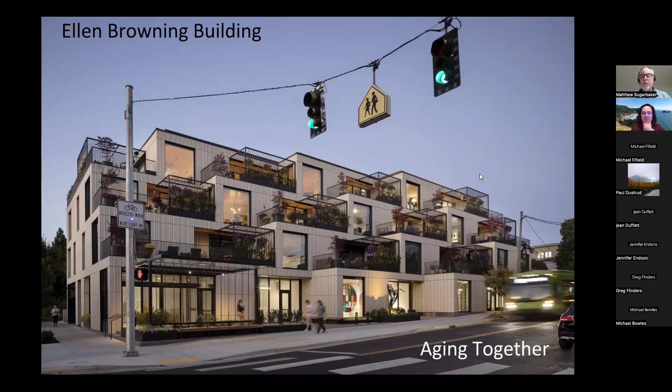When we first were approached, hold on, it's not advancing. Oh, maybe we should have tested that too. There it goes. We don't need to do the continuing education stuff since Kathy already did that.

When we were first approached by the client, they were a group of friends and family that lived in town in Portland and traveled together and hung out together and had been that close knit group for a long time. They really started to talk about how do we keep doing this as we grow older? How do we grow old together? This was sort of the word cloud that we discussed quite a bit at our first meeting. And that concept of how do we age together became very important.

The main clients were two families, the parents and the daughter, the McCabe's, and they really drove most of this design. They were like, how do we keep together and not, as we age, get isolated as people tend to in single family homes out in the suburbs, or even in multifamily buildings, where as you age, it tends to isolate you. They were concerned about that.

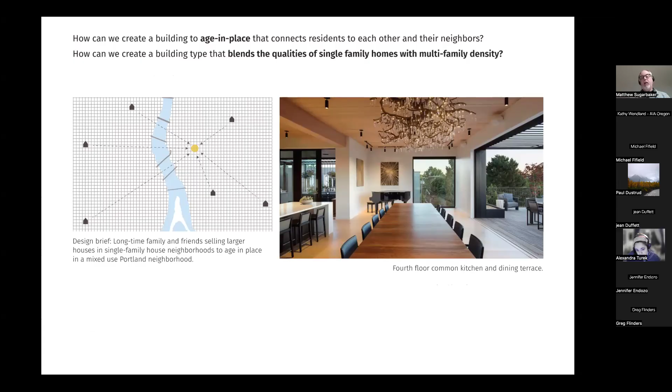That question of how do we create a building, what does a building look like that supports that aging in place concept, but is also in a downtown, more urban, multifamily setting. So how does it feel like a single family home, but in a multifamily sort of density?

The neighborhood they picked, and they came with this site, we didn't help them with site selection, was in the neighborhood of Portland, southeast Division Street, which is a very walkable, vibrant, multifamily, mixed use street. It's about 10 blocks that have really densified over the years. This was a site that just had a couple of single family homes on it, and over the years they've been replaced by these sort of 4-story buildings. But it means there's a lot of life, a lot of activity on the street, and they really liked the walkability of this site.

But what most buildings are on this site, sort of 4-story, pretty dense, stacked in, not a lot of amenity. Most of them are really just retail on the first floor, multifamily at the top, pretty efficient. Hacker has 3 buildings over on 33rd, this one's on 28th, so we've done a lot of work on this street, and it's a very efficient type of mixed use building.

They wanted something a little different. Also, the fact that they were just doing 10 units, the program was just 10 multifamily units and some mixed use, we didn't need to use all the FAR on the site, all the floor area ratio. So we had a lot of room to sculpt the 3-dimensional form. So how do we break down that scale?

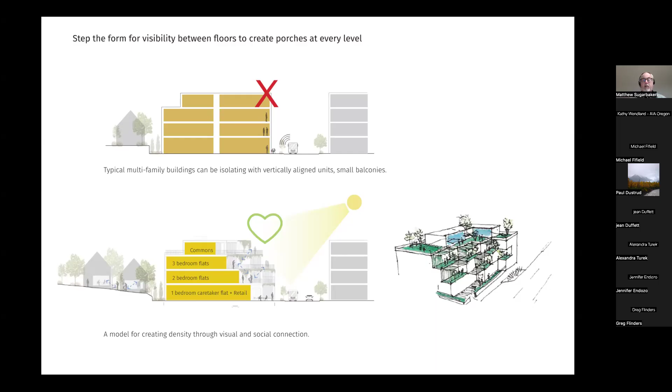The drawing on the bottom right was one of the first sketches Corey did of how do you break that down in a different sort of way. One of the things they came with is when they vacation, they go to Greek hill cities, and how connected those feel, how even though they're all these individual little buildings, how much they're visually and acoustically connected and very vibrant. That was a big inspiration for this building.

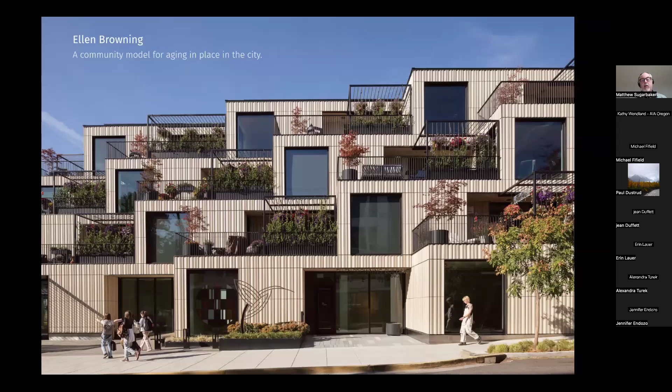So we ended up looking at how do we sculpt this building back and sort of mimic the hill. Behind this neighborhood, or behind this building, is a big rolling hill, and how do we mimic that hill geometry and connect these units, unit to unit, being able to see each other and interact, although having your own isolated single family home on one level that's easily accessible, but then being able to see all these other levels adjacent to you.

We also have a lot of indoor space, but every space having their own private outdoor space was very important. This was a way for us to break down that scale and give each unit their own sort of private and semi-private outdoor space, as well as obviously their indoor space.

That connectivity from terrace to terrace became really the first concept of how we connect these units in a different way than most multifamily buildings, so that your neighbor is a part of your life. As you're out on the deck and other people are on the deck, you can have those conversations, see each other, interact in a more natural way than having to break through the inertia of going up and knocking on somebody's door. They wanted something much more organic, but also spaces for coming together and connection, which we'll get into in later slides.

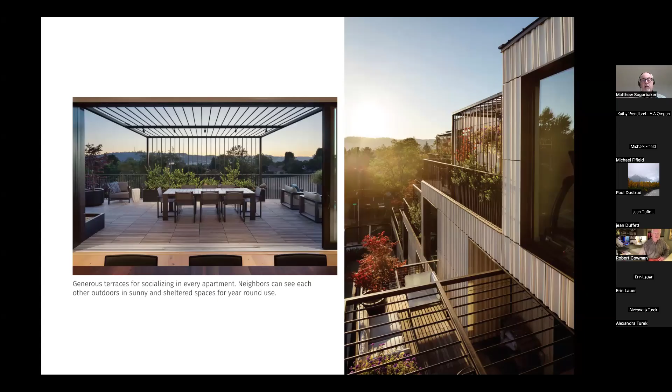The entry to the building, in the center here, is also part of that same community. That lobby was meant to be a public art gallery to showcase the family's artwork, and it has been over the last few years this roving, changing art gallery that was open to the public. Right now it's actually showing artwork that people in the building have created, but it was also showing artwork that they own. It's another way to bring the public in and interact, have this building interact with the neighborhood and the public, and have a way to not make this building feel too isolated, bringing in outsiders as well, but in a controlled way.

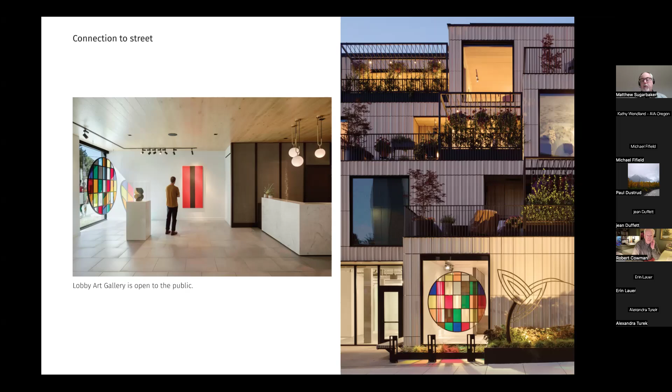So we're excited if somebody gets in there to see how that fleshes out, but so far we've still been looking for the right tenant.

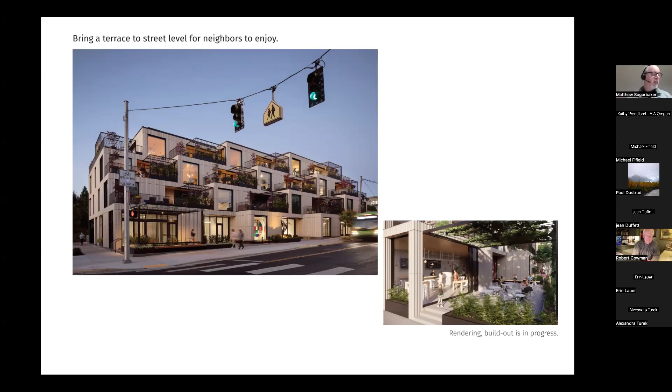In the lower right here, that's the other retail. There are two small retail spaces, one of which is now the building manager's office, and the other one they're still looking for a tenant for, but having some standard small retail spaces could help inform that public interaction.

So we were talking about the terraces mostly — that was a big driving factor in the shape and the form of the building. But the other thing this peeling back of the mass allowed the units to be is open on multiple sides. Some of them are on the corners, but some of them aren't. This peeling back also allowed the interior units to have access to light and air from at least two sides, and some of them have access to three sides, which is very unique for this sort of multifamily density building.

And then having these spaces have outdoor space that's covered, outdoor space that's not covered, outdoor space that's sort of separate. We have this trellis that goes over part of the outdoor space, and once the vines grow up a little bit more, they'll be very private. So you have this sort of private outdoor space, and then you also get out into the more open outdoor space.

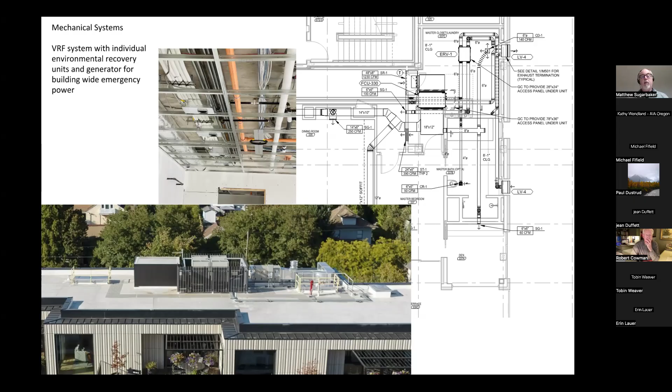The building also has a generator in the basement because they had significant emergency power desires in the units, way more than just emergency lighting and things like that. Every unit has dedicated outlets for if they have equipment or medical needs, and outlets in bedrooms and living rooms that were on emergency power. So the emergency power for a building that seems relatively small was actually a decent sized generator, because quite a bit of the building is on emergency power. But that was part of the aging in place concept, not knowing what type of medical needs or equipment would be in the units, and having some peace of mind that the building could handle whatever they throw at it as they live there for years and years.

For the outside, we were trying to make it out of something that could really help with the main concept, be durable and long lasting, require very little maintenance, but also support the concept. So we ended up with this fluted terracotta system, integral color, that changes how it looks as the sun moves and as it changes. This warm color, inviting to touch, interesting shape. You're really next to this cladding quite a bit since there's so many outdoor spaces. We wanted something warm and dynamic and ever changing, that sort of mimicked the natural biophilic patterns and shadows that plants and other things give, something that would feel just a little bit different every time you look out.

But we didn't want to have it too crazy custom, so this whole building is made of 4 shapes. Everything in the whole building is just these 4 shapes: 2 straight shapes and 2 corner shapes, and everything is just different lengths of those same shapes. But it meant that this building is on a very strict module. It's not like other siding materials where you can just trim up a panel a little bit. You can't do that with any of these. So every corner, every window, every joint had to be very meticulously followed, lining up on what the module of the system is.

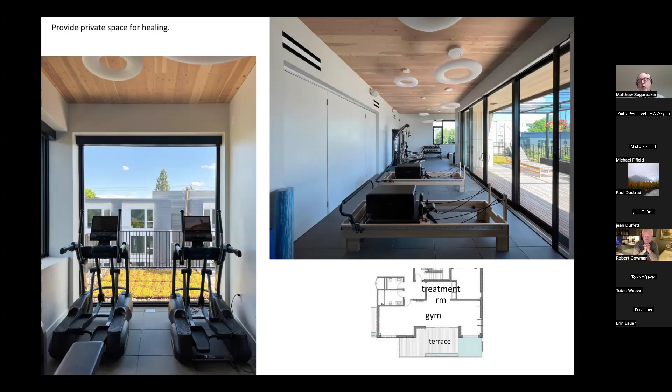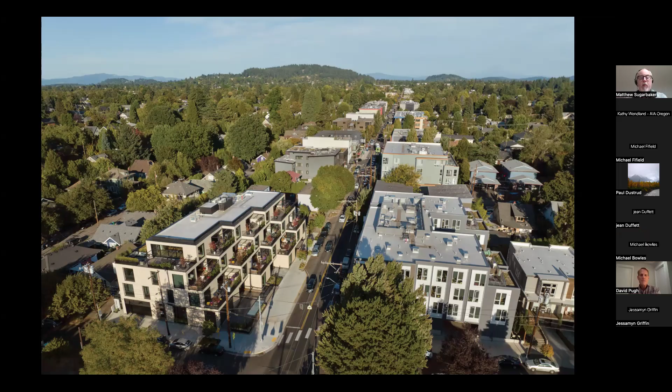What I was kind of curious about, looking at the floor plans, was I love how it steps back. I live right next to this building, and I didn't realize the inspiration was like Grecian hills. So that's fun for a flat site to kind of mimic that.

We did all the shear on that stair elevator core. Every bit of it is in that one core. Yeah, it's a really thick wall, it's doing a lot of the job. Then the other stair is just a framed-up braced stair, it's not doing anything special. But yeah, those two thick wall tubes you see in the middle are doing all the shear. And around it there's a bunch of shafts that are the main vertical connections running all the way through the building.

Because as this building steps back, we can't really have any shafts on the south of the building since it keeps moving on you. And even on the north of the building, it moves back when you get to the 4th floor. So this middle stair core was our main vertical heart of the building - shear, mechanical, vertical circulation, all the vertical penetrations were done through that. There are little penetrations all over the place, but that's the main trunk line of everything.

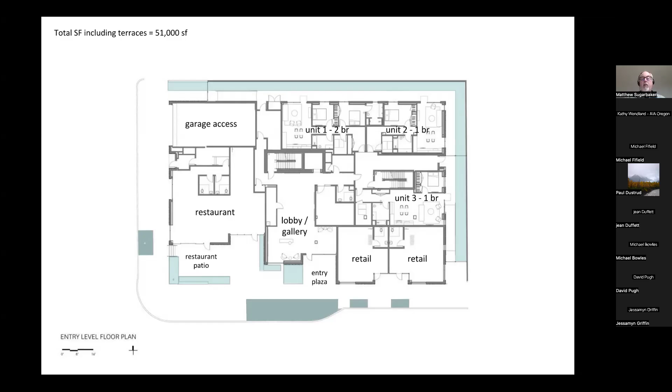Lori asks, what's the average square footage of each unit? That's a good question. The residential area is 31,000 square feet, and there's 10 units, but some are really small and some are really big. Like this 1-bedroom unit on the corner on this floor is different than the 2-bedroom unit 10, which is this whole side.

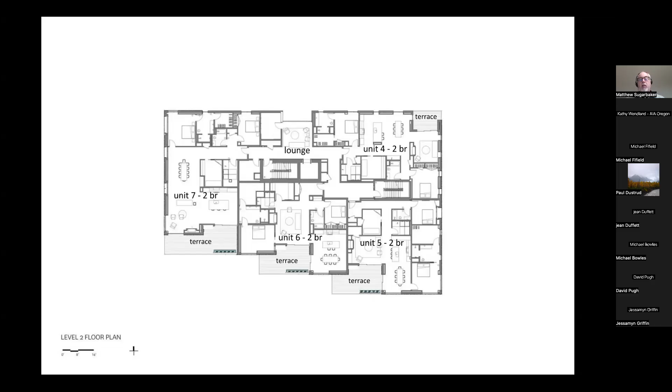That unit's pretty large. They're pretty big, but they're also pretty small. I'd say the big units average around 2,000 square feet. They're pretty big. These on the second floor are a little smaller, but really unit 9 and unit 10 are enormous, and they both have 2 terraces - really, really big units.

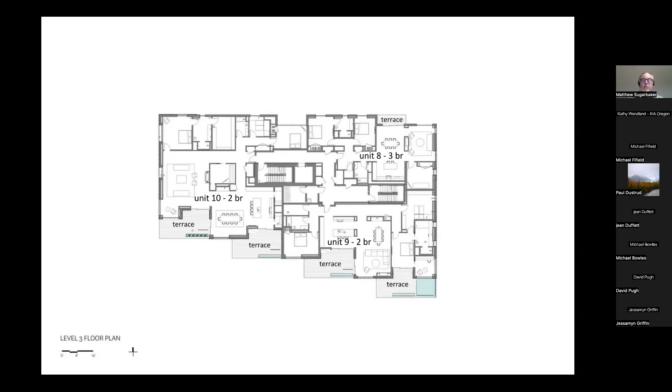Any more questions? We got to fill 2 more minutes, guys. So we're legal.

A bunch of people weren't on when Jean on chat asked me this question - I was going to share it, but she cut to the chase. Ellen Browning, the name of the building, is named after Ellen Browning Scripps, who was a big philanthropist in Southern California, La Jolla, in the late 1800s and early 1900s, and set up tons of foundations and organizations that have Scripps as part of the name. They were big newspaper owners and owned a bunch of stuff back in the day. She is related to the McCabe family, and they really respect her and the work she did in the community, so they wanted to name the building after her. That's where the name Ellen Browning came from.

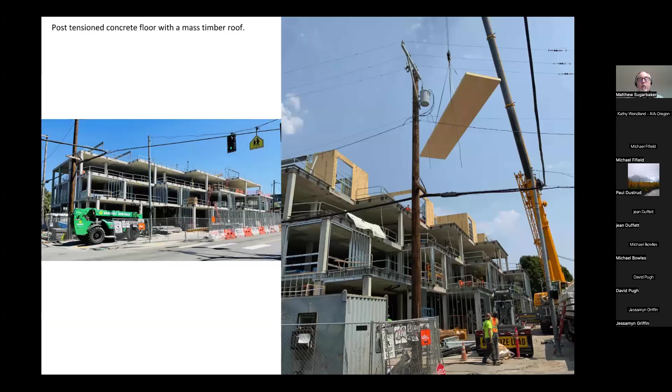Was exterior insulation included in the wall assemblies? Yes, we did a hybrid. There's insulation in the wall cavity as well, but we had 2.5 inches of exterior insulation, mineral wool, in the cladding support system — you can kind of see it in this photo, that brown stuff is all the exterior insulation. It's a breathable membrane, a hybrid insulation wall system. We were looking for every bit of insulation we could get in the wall because we were trying to shoot a little bit over code for overall R-value — I don't remember the exact number, but it was significantly over code minimum.

And the windows — I did talk about the windows. They're all fiberglass, Cascadia fiberglass windows, very highly efficient frames and glazing. It's a very tight thermal building.